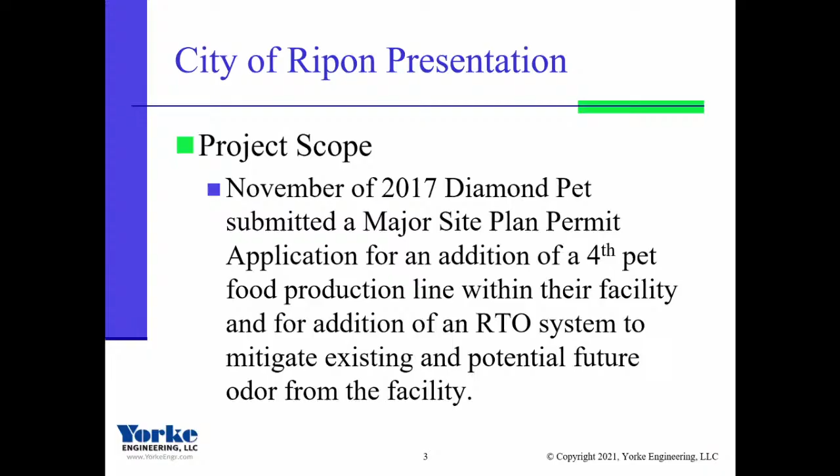We do have some folks that have joined us online. So the project scope: we got an application in November of 2017 from Diamond Pet Food to add a fourth pet food production line within their facility and for the addition of an RTO system to mitigate existing and potential future odors from the facility.

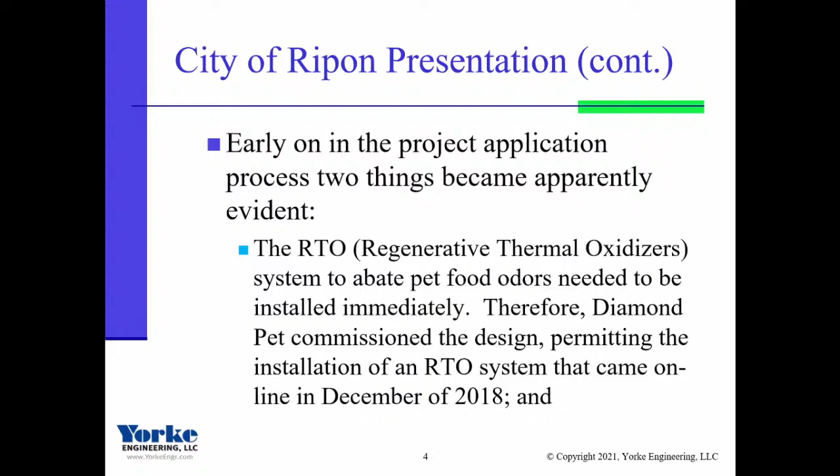Early on in the project application process, two things became apparently evident. The RTO, which is the regenerative thermal oxidizer system to abate pet food odors, needed to be installed immediately. Therefore, Diamond Pet commissioned the design and permitting for the installation of an RTO system that came online in December of 2018. Secondly, an environmental impact report was needed for the project to ensure appropriate project impacts were being mitigated according to CEQA. As such, an EIR for the project was kicked off in November of 2018.

So the EIR process has several steps. First, there's an initial study or notice of preparation, which had a review period from November 14th, 2018 through December 18th, 2018. A notice of preparation is a brief notice sent by the lead agency, the City of Ripon, to notify responsible agencies and the public that an EIR is going to be prepared. The NOP is meant to advise and solicit comments and suggestions regarding the preparation of the EIR, environmental issues to be addressed, and any other related issues from interested parties, including affected members of the public.

After the notice of preparation and the initial study were prepared, preparation of a draft EIR commenced, starting in December of 2018 and running all the way through to August of 2020.

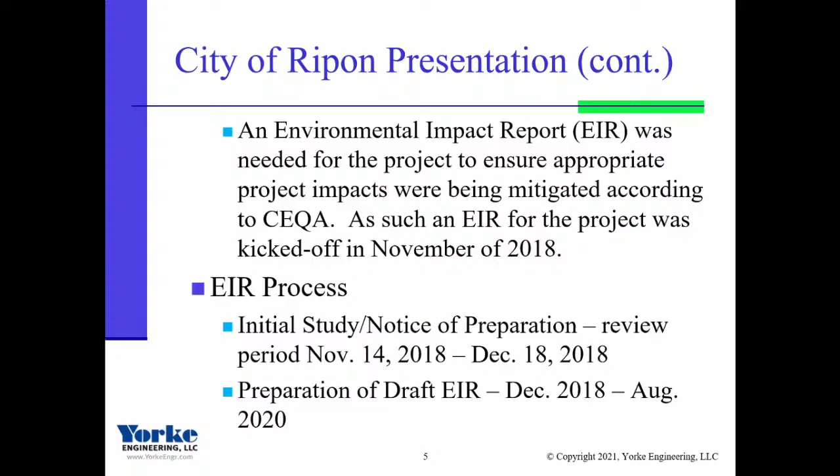In August of 2020, we released the draft EIR for public review. That took place August 28th, 2020, and the comment period ran through October 12th, 2020. Basically, the public review period for the draft EIR provides public notice of its availability and opens it up for a public comment period.

During the comment period, the public is invited to submit written comments on the draft EIR. Once the public review period is completed and all comments received, preparation of the final EIR can commence, which includes responses to comments received. Then, 10 days prior to any action on the final EIR, slated to take place at the April 19th Planning Commission, the final EIR must be made public.

So we're kind of right in the middle of receiving all the comments. The comment period has been closed, and the preparation of the final EIR has commenced and is wrapping up as we speak.

The next steps left in this process would be the Planning Commission holding a public meeting on April 19th, 2021 to do two things: first, to certify the final EIR for the project, and then to make a determination on the project, which is the addition of a fourth pet food production line within Diamond's Pet Food's current facility. With that, I'll turn it back over to you guys to step through yours.

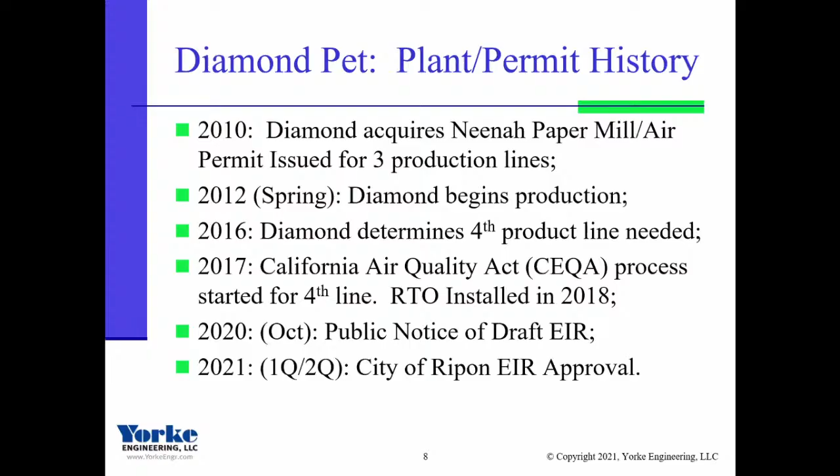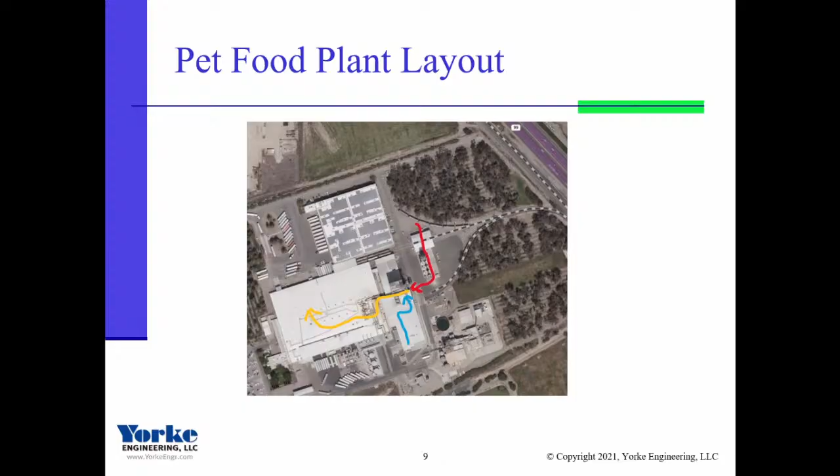We'll show you that - about 260 degrees for 25, 30 minutes - and then on into the warehouse where the yellow line is, and again the other areas where the solar panels are on the roof, that's all warehousing for shipping out. The next slide is just a little more detail, same thing - the product is a continuous flow, it comes in and goes out. That's about it there, not to get caught up in the details.

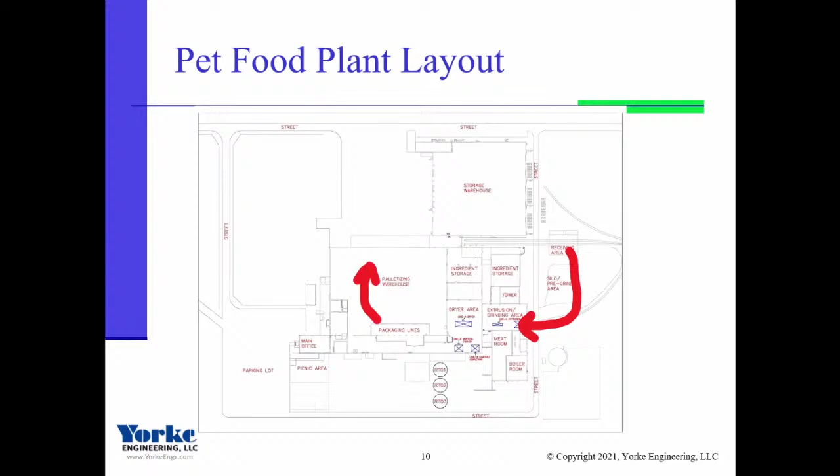This slide's intent is to show the current 3 production lines. In the lower corner there's an empty void - that's where the plant, when originally built, was designed for 4 process lines, and we left that 4th spot open. I also want to point out that all the exhaust that comes off the cookers, the extruders we call them, is all ducted to the RTOs, and we'll see more of that.

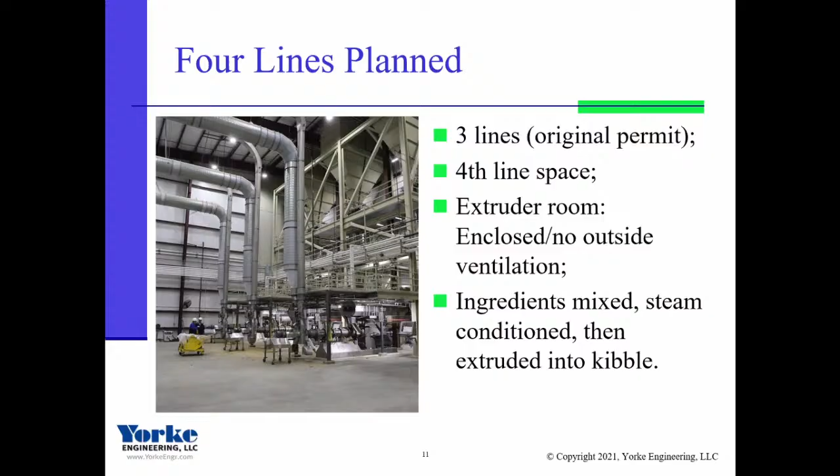Here's the dryers I mentioned earlier, again with the space for the 4th line. I'll mention that Diamond Pet Foods now has 5 plants, and about every 4th or 5th year they build an additional plant across the nation. So knowing in 4 years we would need another line was evident to us from the beginning.

What I want to also mention is you'll see all the ducting there. That too, early on when we did all the surveys and studies to determine where the odors are coming from, this is another source off the dryers - much like an oven in the kitchen, if an apple pie is being baked you can smell it as the exhaust comes off the oven. So the odor's being abated off of those dryers as well.

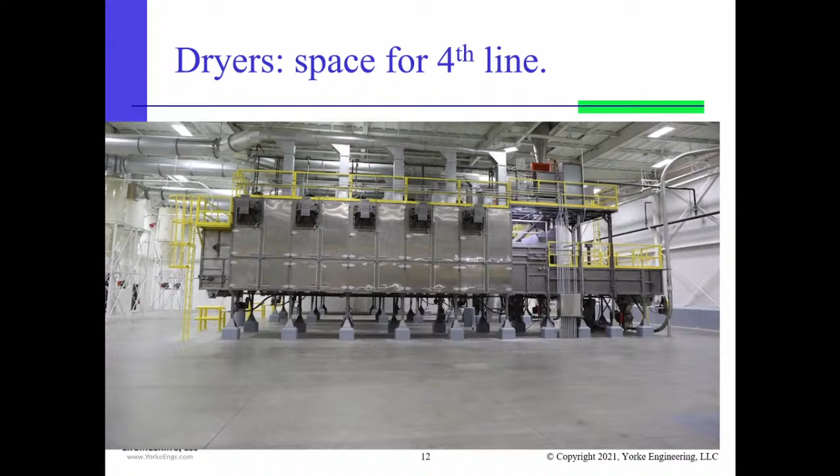Let's not get too caught up in all this, but this does depict the existing 3 lines and a 4th line and all the devices that would produce odors and how they're all ducted to a common header at the very top there. Those are all directed to the RTOs, so all the odor-producing machinery all goes into a common ducting system to be treated by the RTOs.

Randy, can you speak to this slide?

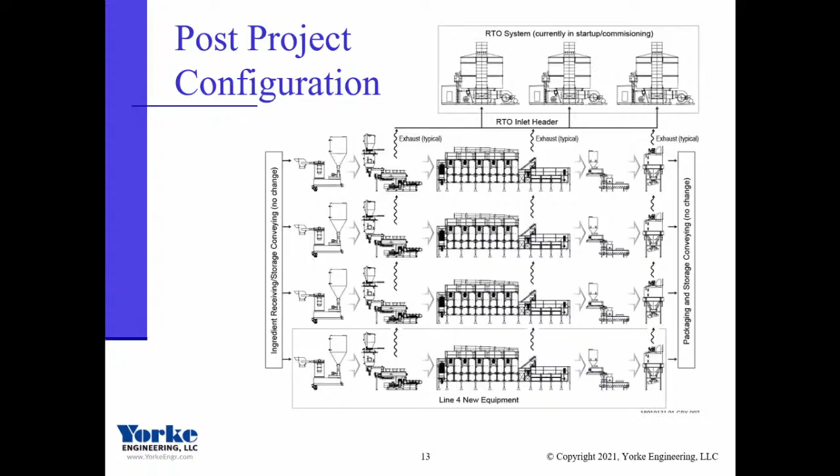The next slide shows the trends, the monthly odor complaint trends since the plant started up. To the far left, you see that red area. That was when the plant first started in 2012, ran like that until 2014, without any type of RTO or anything controlling the odors.

Then the blue section is where the first line of odor abatement was installed, the cold plasma injection. We had great hopes for that. Mark will talk a little bit more about that in a minute, but you can kind of see the trends there.

I want to point out one thing. You see how they go up and then down and get real low, and then they go up again and down. The down side is during the summertime when there's really good ventilation in the valley. It's warm, there's a lot of upflow, and the wintertime is the worst time. The weather is very difficult. That's why this has been a challenge, because of the inversion layers and the way it just clamps down with very little wind in the wintertime, colder months.

The yellow section is when we had both the plasma injection and the injection of an odorant to make it a more pleasant, agreeable smell. But as you can see, we had a pretty good uptick in that period too. So it was really clear that something else had to be done.

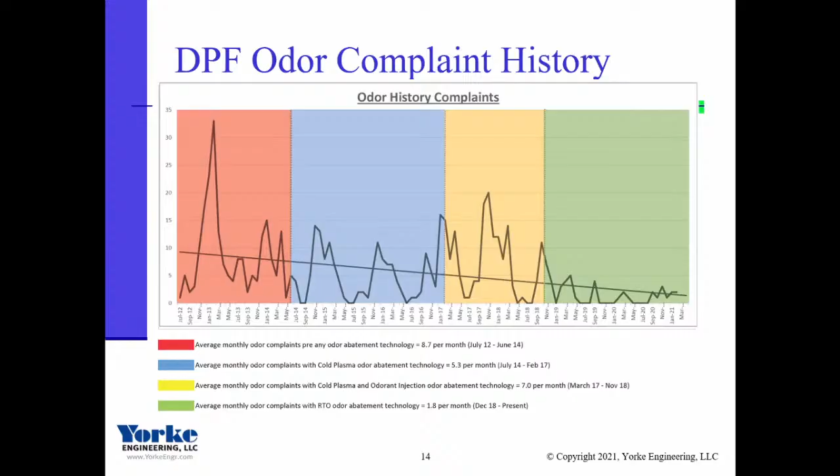The next slide presents some of the details on those same odor complaints. This time it's doing it by year summaries, and we're summarizing the numbers of complaints that were actually confirmed by an air district inspector. That's the normal process.

The air district comes out after they get a complaint as quickly as possible. They've been coming out really quickly lately, like within an hour, which is really good. It really helps to find out what's going on.

And then we have the unconfirmed odor complaints, and those numbers, the confirmed numbers stay up quite high. So in other words, early on in the first few years, there'd be an odor complaint, the inspector would come out and they would be able to confirm it. They'd smell it too, it was still lingering in the air. But as time has gone on, it's gotten to where the odor complaints are mostly unconfirmed now. In fact, in 2020, there were no confirmed complaints at all.

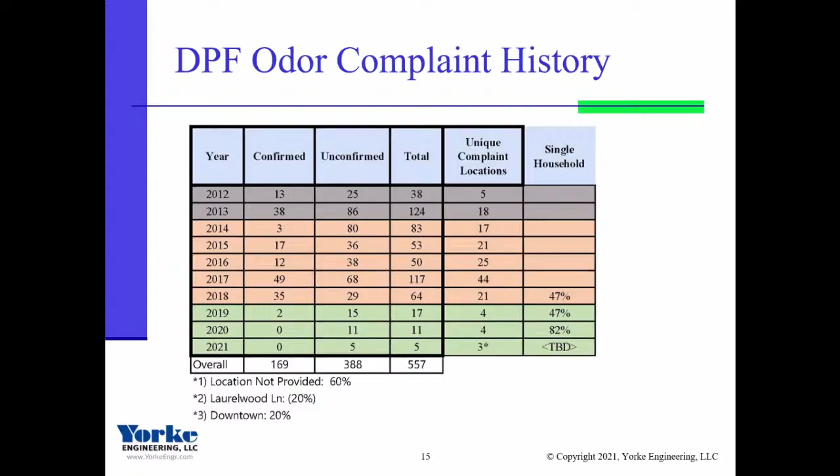So next slide, I'll speak to this odor mitigation history. In 2012, 2013, there was an odor study conducted. That's where I mentioned earlier how we went about determining which pieces of equipment needed to be abated. And through that process, we determined that cold plasma was a recommended choice.

Briefly, how that came about: the most deciding factor for me was when I spoke to the family owner of a pet food manufacturer in Ogden, Utah. Ogden's about 60,000 people, it's a skiing community, and they're at the base of the mountain. They had similar situations that we have here in the wintertime, and they were pleased. Mr. Benken recommended to me to go with the cold plasma system because it was working for them.

The second thing was it had a much smaller carbon footprint. So when it comes to air pollution control and getting the system permitted, it'd be a lot easier because it wouldn't be producing as much NOx and those types of things. Definitely cost was a concern, and ongoing cost was a concern.

So that cold plasma system, we installed it. The cost associated with that at the time was about $3 million. However, it was determined during 2014 to 2017 that it was inadequate, even though it was never expected to abate odors 100%.

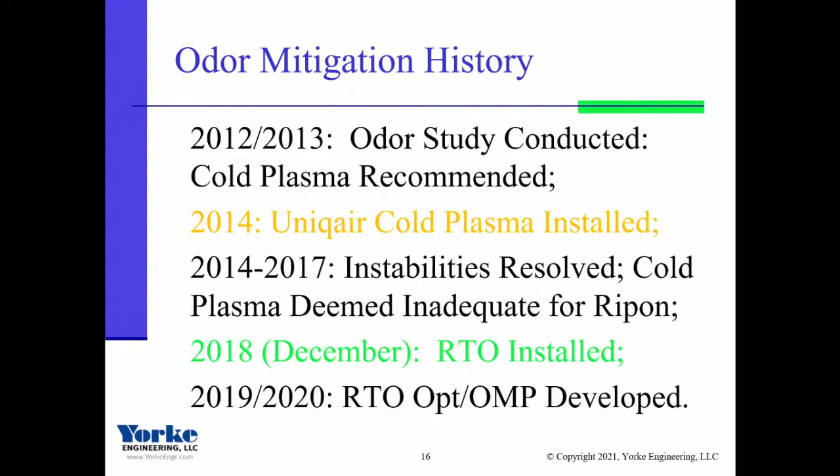Let me see what we have next. Randy, you want to speak to just the temperatures and how that all works?

A number of mitigation measures have been implemented in the last couple of years with the startup of the RTO. The first thing, and this is really interesting, a lot of when I talk to folks out and about - I like to get out and around the area and talk to people to see what their experience has been - I find out that they don't really fully understand, and that's understandable, how these plants work.

In this case, at the Diamond Pet facility here in Ripon, essentially we have a situation where the tail of the plant is kind of wagging the dog. The plant is actually controlled by the RTOs. The plant cannot be operated without the RTOs up, operating at the temperature set point, which in this case is 1650 degrees Fahrenheit. There has to be sufficient capacity in those units. The computer knows how much the RTO can process, and knows what's being requested to operate, and it won't let you operate the plant with anything more than the RTO can handle. And any dampers have to be all closed - it's got to be in the configuration where all the exhaust is going to go to the unit.

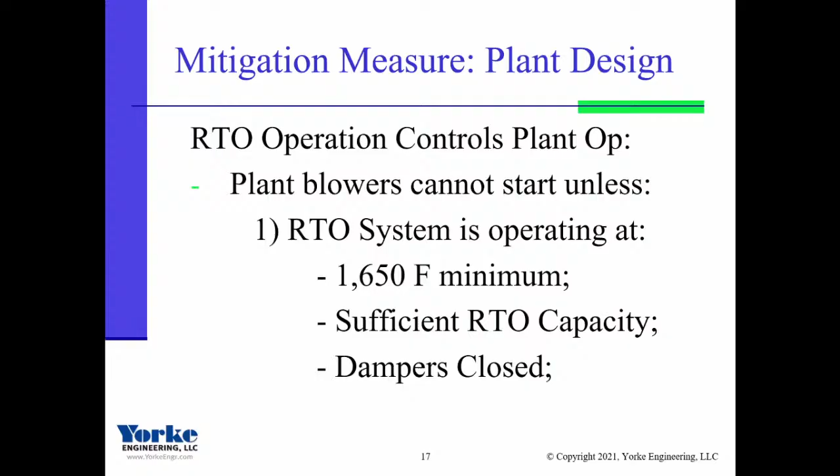I don't want to take too much time on this slide, but I want to point out that our RTO, regenerative thermal oxidation, is the best means of controlling organic compounds and reducing organic compound emissions. Reducing organic compound emissions doesn't eliminate 100%, but it's very, very close. It does it by subjecting the odorous or organic-laden stream to a high temperature for a certain period of time - basically oxidizing or combusting those organic molecules. The industry standard has been about 1400 degrees for about half a second. So if you can bring your organics into a box and hold them at that temperature for about half a second, you're up around close to 100% abatement.

In the case of the Diamond Pet Food Plant, the RTOs were designed purposely for 4 lines of production, and they actually have a little over 1.5 seconds - 3 times the residence time, if you will. They operate around 1650 degrees, actually a little above that, but that's the permit requirement, 1650 - you can't go below that. I make that point to show that the plant has been sufficiently designed to handle the 4 production lines, and actually to go beyond that. Now, if you go longer, it's questionable whether you get added benefit, because there are a lot of other engineering considerations that come into play. But basically this shows you how a company goes about designing an RTO.

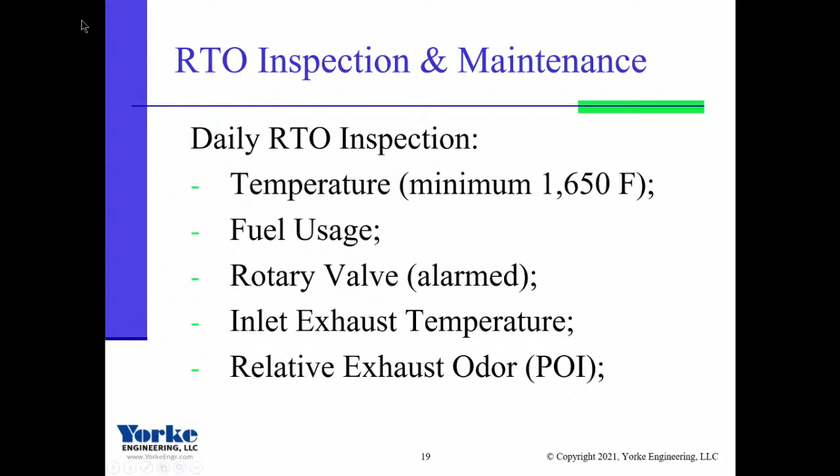One of the things that we learned in 2019, the first year of operation, was that there's a lot of things you can do to really make these RTOs operate well. You can't just turn them on and walk away from them, forget about them - you really do have to watch them, monitor them. And Diamond does that. They were set up and designed to monitor temperature, fuel usage, valve operation, exhaust temperature, and every day a Diamond employee conducts what we call a personal odor inspection.

There are a couple of very small holes on the exhaust of the RTO, and an operator who's been trained to do this goes out there with a device he can put inside the pipe - a little stainless steel tube about a half-inch diameter that cools the exhaust. Then he's able to actually smell the exhaust coming directly out of the RTO that's been abated. This isn't a quantitative measurement, but a qualitative one, and it allows comparing the odors from one RTO to the next, to decide if one of these units needs to be cleaned.

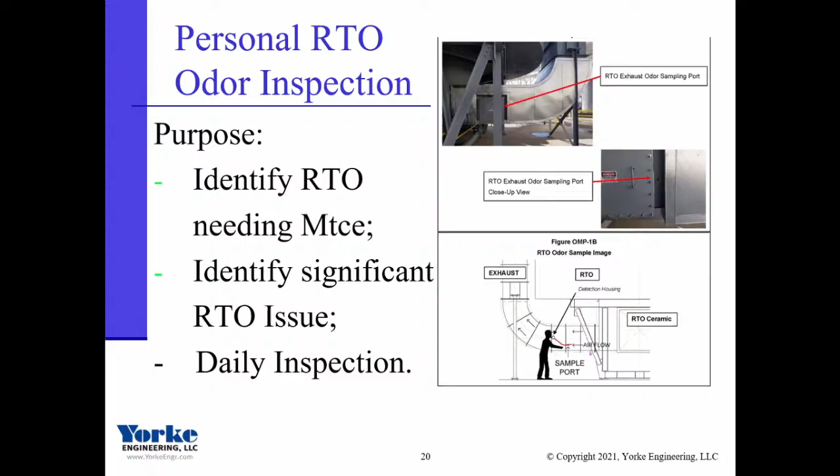Is there anything going on here we need to be concerned about? Are they all smelling about the same? Did it change much from yesterday? What's going on with this unit? It's mainly just keeping their hand on the pulse of the plant.

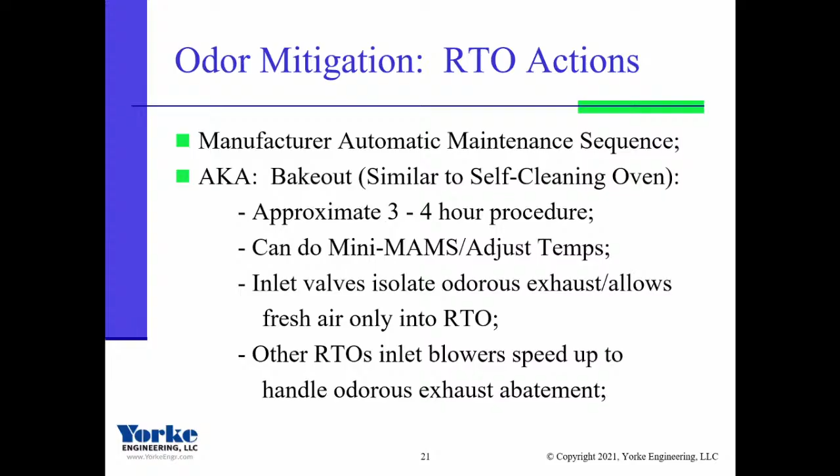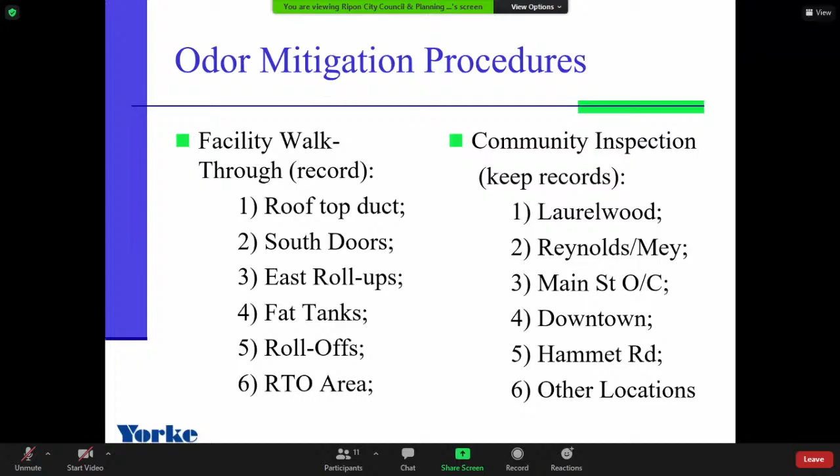Other measures taken on a daily basis are a facility walkthrough and a community inspection that are conducted. The facility walkthrough consists of the project manager walking all around, up on top of the roof, looking at the doors, making sure everything's closed inside. And I'll mention, those of you that have been in the plant, the odors there are just very, very dilute, but we still don't want anything like that going out into the air. That's inspected as well.

Also, a community inspection is done. There's I think 4 different Diamond employees that do this, driving around the area and just stopping to smell what's going on out in the air, to see if there's anything they notice that needs attention.

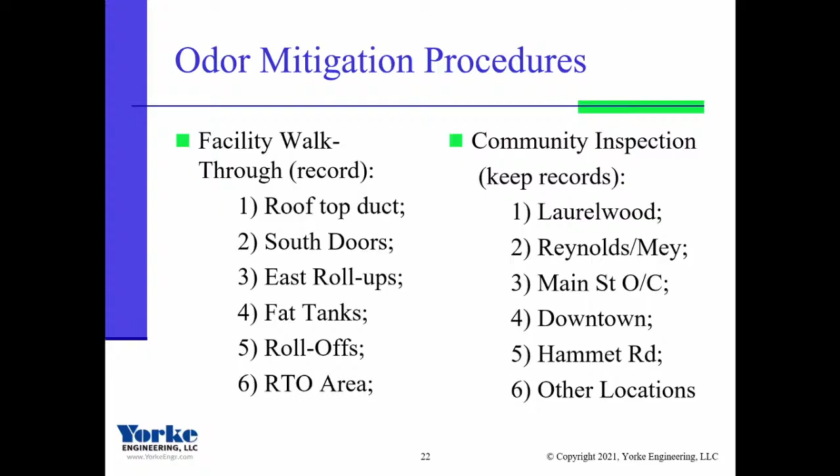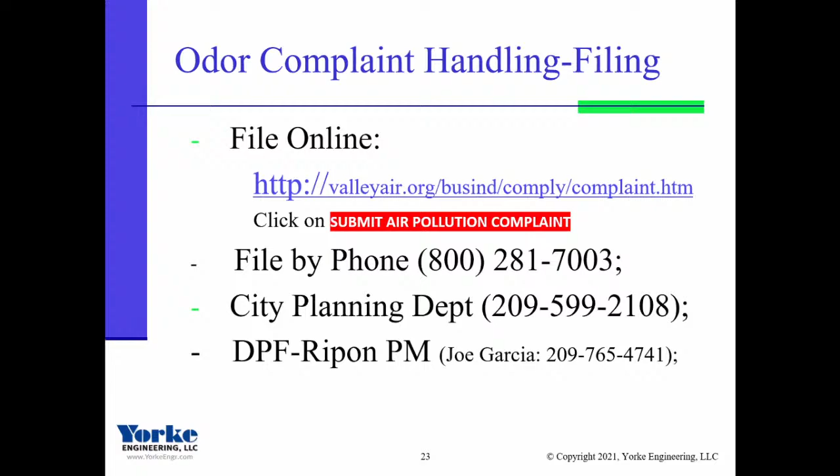And again, it doesn't matter if that odor complaint is a confirmed one or not, or if we're the first person that they call. The plant's going to take them very seriously and look into it, find out what's going on.

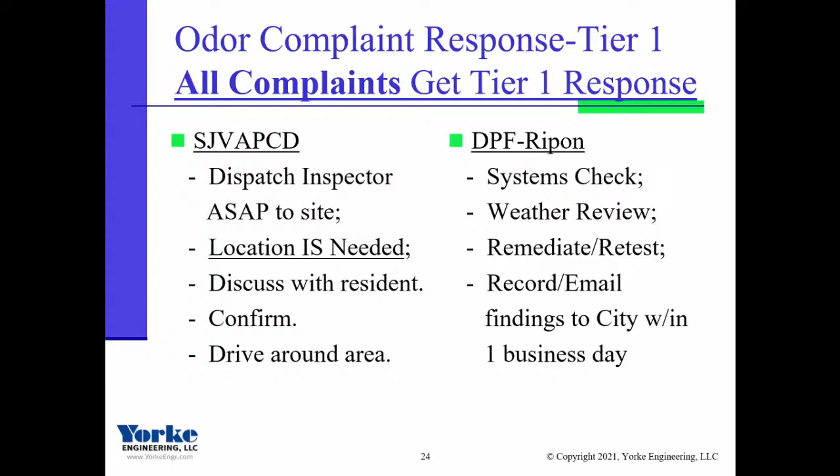Diamond Pet is going to be doing their own evaluation and inspection, a systems check of the RTO and how it's operating. They're going to look at the weather, look at the trends at the time of the odor complaint, and see if there's anything they can do to remediate. They might go back and retest the RTO again, see if maybe they missed something, maybe they need to look at that again. Then they record the findings and let the city know within 1 business day. And on a monthly basis, there's a report that goes to the planning department, to Ken's office.

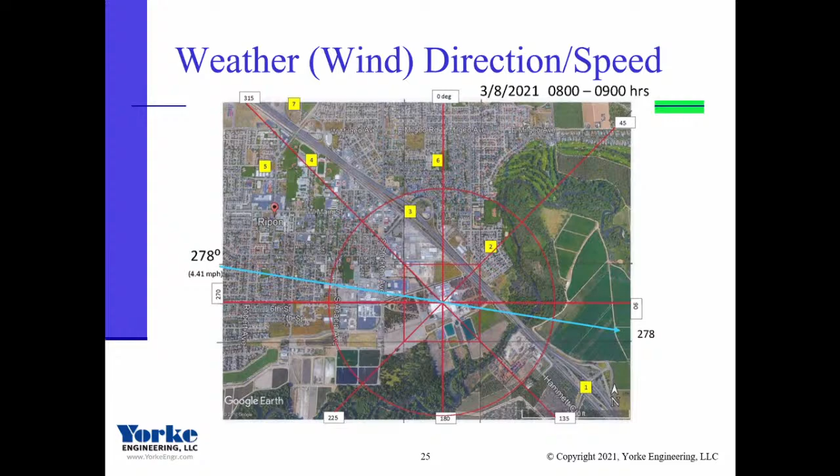Okay Mark, you got tier 2 - did we skip a slide or no? Maybe I skipped tier 3. Yeah, tier 2 I did. Oh, okay, I'm sorry. Okay, the other two tiers, tier 2 and tier 3.

So these are tiers that have actions that start to get a little more serious, especially tier 3. But tier 2 is activated if there are additional confirmed complaints in the same week, or if there is an unusual increase in unconfirmed complaints.

Right now, as I mentioned, we're probably having a couple of unconfirmed complaints, anywhere from 0 to 2 per month roughly. We can go back to that data again. But we haven't had any confirmed ones since 2019. The plant will go the extra mile on a tier 2 if there is an uptick, whether they're confirmed or not. Even if we do have a confirmed complaint, right away the plant is going to get excited and look at what's going on, because it's been so long since we've had one.

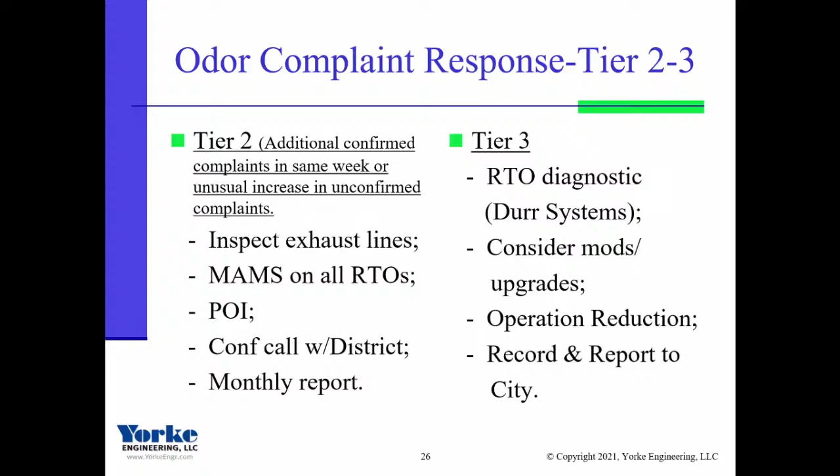And just what do I mean by good neighbor philosophy? What I mean by that is I strongly believe that Diamond Pet Foods has addressed these concerns all along the way, and we've done it very aggressively and assertively. We've gone above the manufacturer's expectations, especially with Durr in mind. Randy didn't speak to it, but I will.

The system was originally designed to run at 1500 degrees Fahrenheit, and there was a certain amount of VOCs that are expected to be eliminated at that temperature. We run at 1650 and are permitted at that, and are killing almost, what's the percentage? Almost 5% more than the original. Correct me if I'm wrong.

Well, the plant was only required to do 95% in the permit. That was all they were required to demonstrate at 1500 degrees, and they showed that at 1500. So what are we getting now at 1650? About 99 plus, 99.7, somewhere in that. So that's the reason for the 1650 degrees, and the additional NOx that we produce, and the requirements that we're held to as a result of that, and the expense as well.

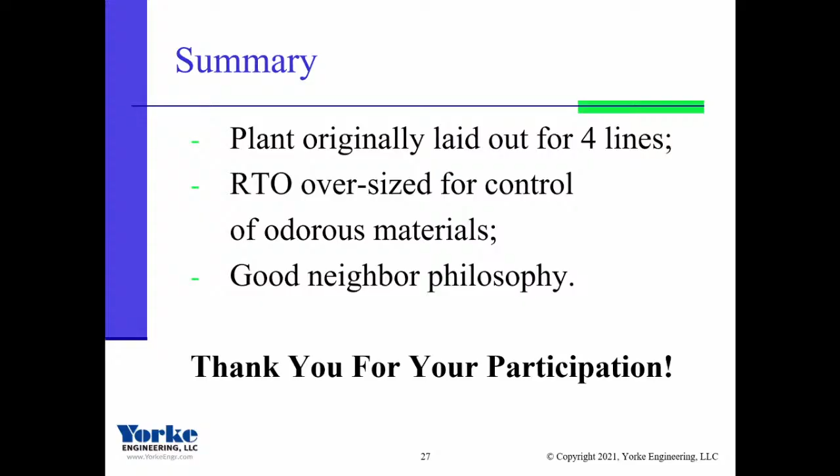But at this point, we're doing everything we possibly can, and we believe that to be our good neighbor philosophy, if you will. So yeah, thank you for allowing us to participate in this.

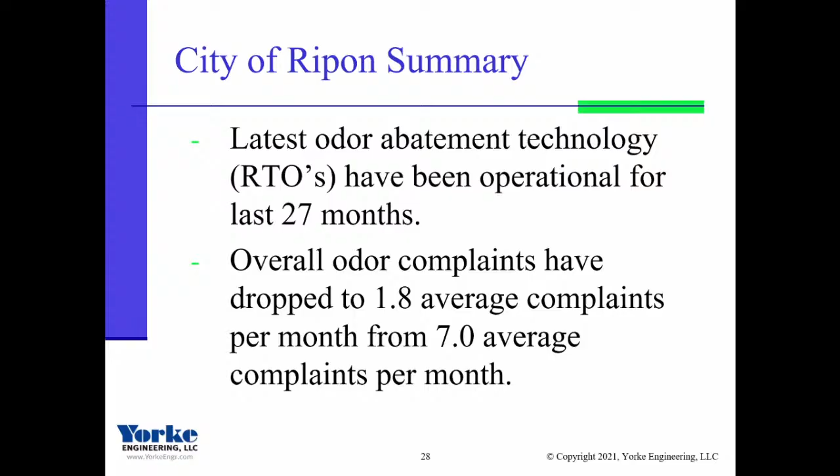Basically, the odor management plan was developed in conjunction with this to ensure the consistent success of the RTOs the way they're operating now. We want to keep those complaints at that lower level and not see them ticking up. As such, the city did actually commission a consultant to do a peer review of the odor management plan,

known as the OS&E report. The Planning Commission probably has that in their packet. It is included with the EIR, and there's some comments on it in there. The purpose of the peer review was to ensure that the OMP, the odor management plan, was on point in addressing odor from the facility, and provided the city and the general public with a really clear and concise mechanism to deal with any potential future odor should the need arise.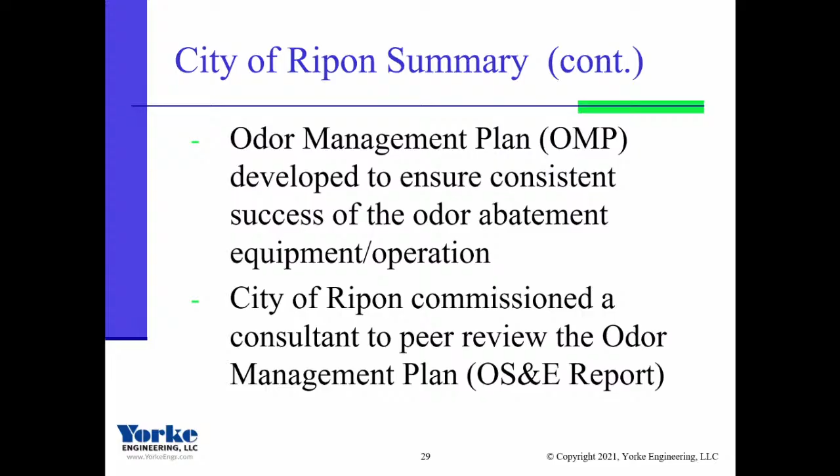So it was, hey, if we're going to have odors in the future, we need a very clear way to deal with them and a very clear, concise complaint process so people know where we're at in that process. The peer review of the odor management plan had some recommendations, and those have now been incorporated into the plan. They took all the recommendations from the peer review and submitted them and put them into the odor management plan to make sure things get addressed appropriately.

So the OMP incorporates, as was mentioned earlier, a tiered system for response to odor complaints. The tiered system within the OMP is meant to ensure the continued consistent operation of the odor abatement control system for the facility. It does several things, but it allows the city to continually monitor odor within the community and address any anomalies which may arise with the Diamond Pet Food facility.

Such a tiered system would bring Diamond and the city of Ripon back to the table, so to speak, to address any significant increases in odor, including shutting down the 4th production line, reducing production back to the 3 that are originally permitted, until odor mitigation is back to status quo. So if there's some odor complaints coming from the facility and we're seeing a significant uptick in odor complaints, it'll get us back to the table.

They might need to look at some other mitigation measures besides the RTO. They could be looking at some different areas of the plant just to figure out why there's an uptick, where they're coming from, and whether the RTOs are functioning properly. If they are, is there another source of the odor at the plant that's not being mitigated? That's what the tiered system's meant to do.

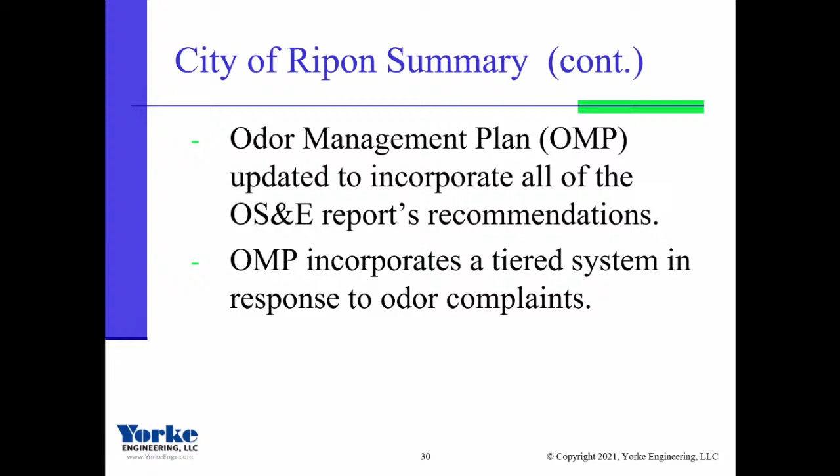So again, just to wrap it up here, basically to re-review, the next steps: the April 19th Planning Commission meeting. They will have a public meeting to make a determination on the project and certify the environmental impact report. So I'll turn it back over to you, Mr. Mayor, for questions and comments from the City Council or the Planning Commission.

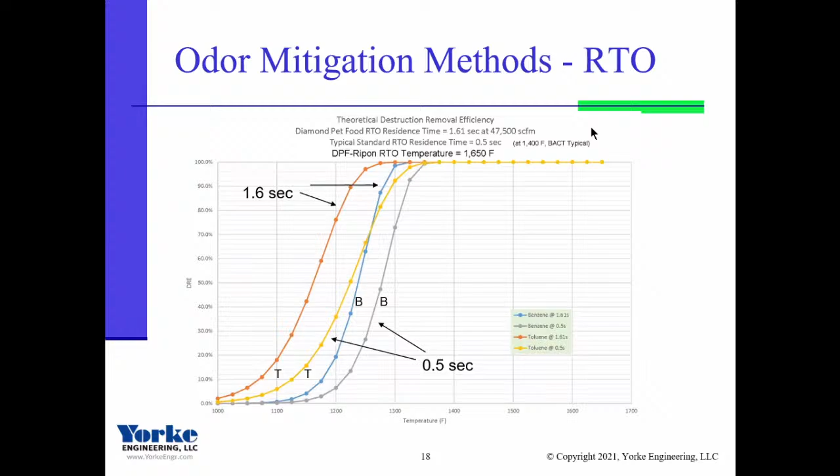There's a lot in that curve, actually - there's quite a bit to take in.

Then it bumped up, not significantly, but it bumped up this winter between November and January. And that was my experience also. I didn't recall smelling anything. I shared this with the planning director in the winter of '19 and '20. This winter I did smell it a few times again. It wasn't significant or stifling or overpowering, but there was presence. And I guess if anything, I was just surprised.